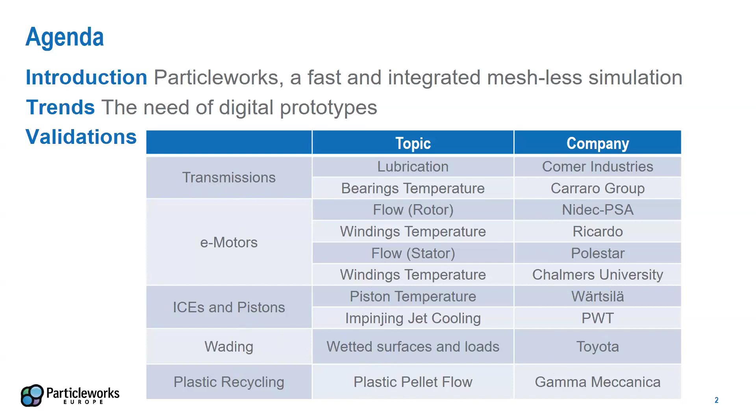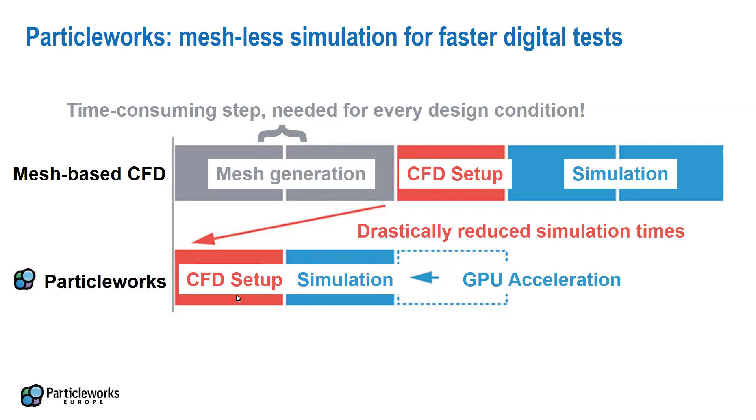So let me just introduce the method first. Particleworks is a CFD software that is a little bit different from conventional mesh-based CFD because it doesn't require this step here that usually takes quite long preparation. Whenever I use mesh-based CFD, I have to prepare my geometry from the CAD, simplifying it, and also create a computational mesh that is the basis of our simulation. With Particleworks, we can just jump start and go to the CFD setup and the simulation.

So here we have a visualization of the differences. On the left, we have the computational nodes pre-calculated during conventional methods. In Particleworks, on the other hand, we have particles that are themselves the simulation nodes, and they are automatically computed at the beginning of the simulation. So we don't have to deal with this step, and they are automatically generated.

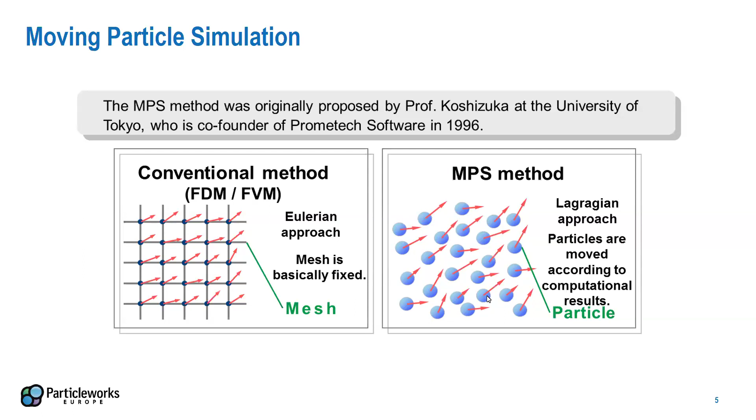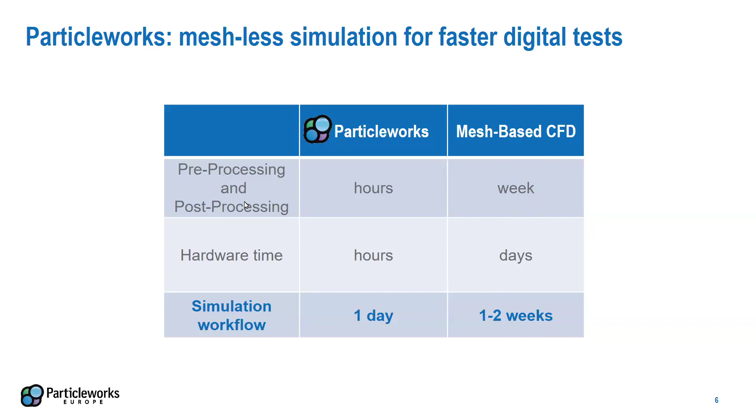Of course, this approach is very suitable whenever we have splashing phenomena, like in gearbox lubrication, or multi-phase phenomena as well. And in general, we are looking into a 1 day simulation workflow for cases that previously required more than weeks. We will see the applications, and if you try to use mesh-based CFD for them, that will require a lot more effort, both on the hardware side and on the pre-processing side, so man-hours.

So in general, what we are looking at is a fluid simulation tool that doesn't require mesh generation, so you can directly use the CAD as it's designed by your design department. It's very simple to set up a numerical simulation. And because the algorithms behind Particleworks are easily parallelizable, we can take advantage of GPUs, of graphic cards, and have more compact solutions in terms of hardware. We don't need a cluster with thousands of cores, but we can leverage the computing revolution that we are seeing in graphic cards.

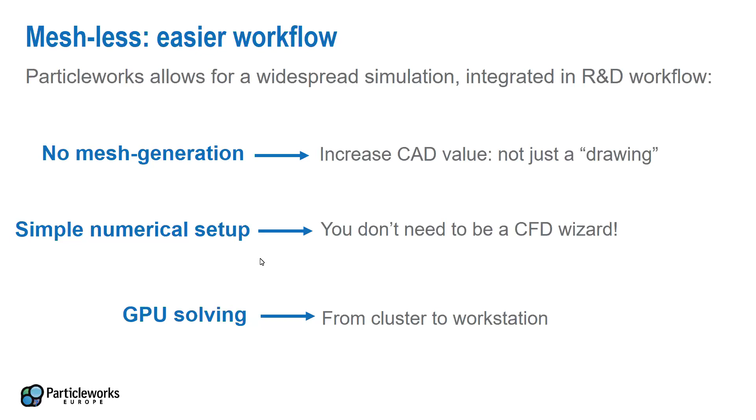So let's talk about trends. Why now? Why is simulation more and more applied in engineering? Well, there are several reasons. We are seeing a world that is increasingly digital because of different trends. COVID and supply chain shocks made this transition towards digital faster in the last years. By digitalizing the prototyping phase, you can have faster R&D and avoid supply chain shocks, so you're not stuck because of price inflation or materials availability.

And moreover, the digitalization of R&D and engineering can actually improve, as shown by this McKinsey analysis, the value of your product, because you reduce time to market and you increase the performance of your system by using digital prototypes.

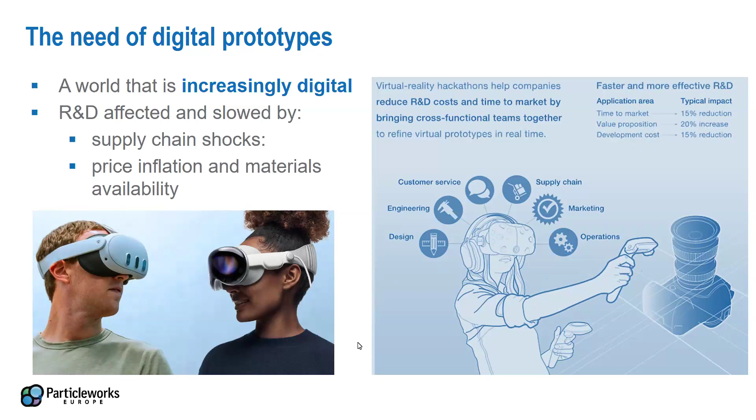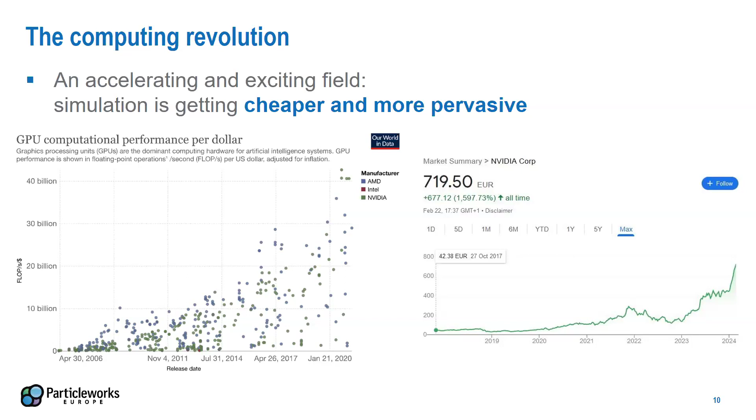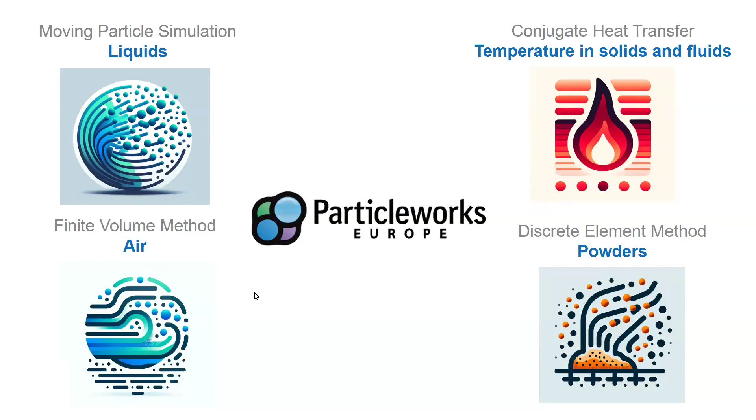And the solution here is not just about fluids, it's also about other aspects that your system might have, like airflow, powders, or, let's say, temperature evolution of your system. So inside Particleworks, we see different modules in the same license, in the same graphic user interface. So you can integrate different aspects of your model, and I will try to give you visibility in that regard

with the examples. So most of the validation we will see today is from our conference. It was held in June last year, and I will also include at the end of the presentation the official invite to the next conference that is going to be in September in Frankfurt. So the results, as mentioned, are coming from our partners that decided to present publicly. So let's see the validation, and let's start with transmissions.

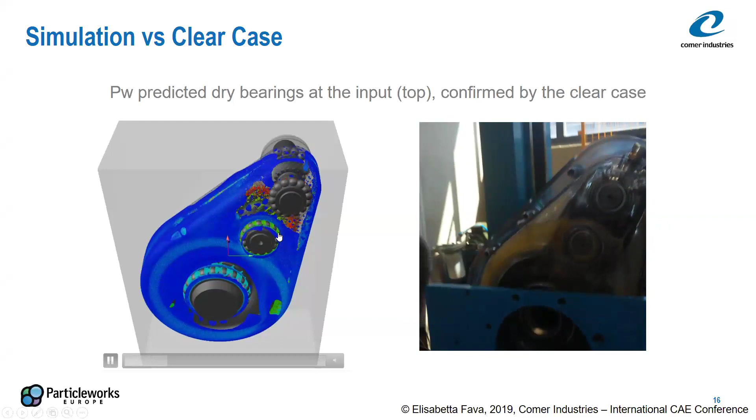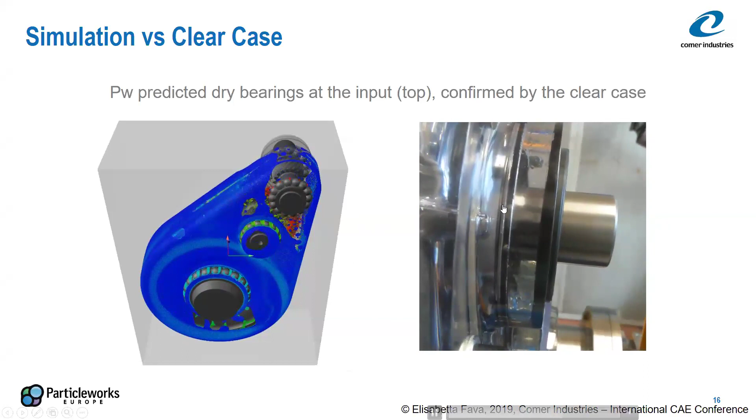One of the first examples of this approach was applied in 2019 by Comer Industries. They develop transmissions for different types of heavy-duty, let's say, vehicles. And we see here a comparison between the standard approach, the testing approach with clear casing, and the lubrication prediction by the software. It's very interesting because you can see clearly that the oil film formation is matched quite accurately by the simulation. Of course, the simulation allows you to extract more value because you can inspect regions in a quantitative way that with the experimental setup you can only guess.

So to validate that, we compared different running conditions, rotational speeds and directions, and we evaluated together with Elisabetta Fava the amount of oil in different regions. So as you can see here, the engineer in Comer Industries correlated different areas, and 4 means a good lubrication level. And we can see clearly that for this condition, there is good lubrication, while on top, there are bearings that are not lubricated, and it's confirmed by the simulation.

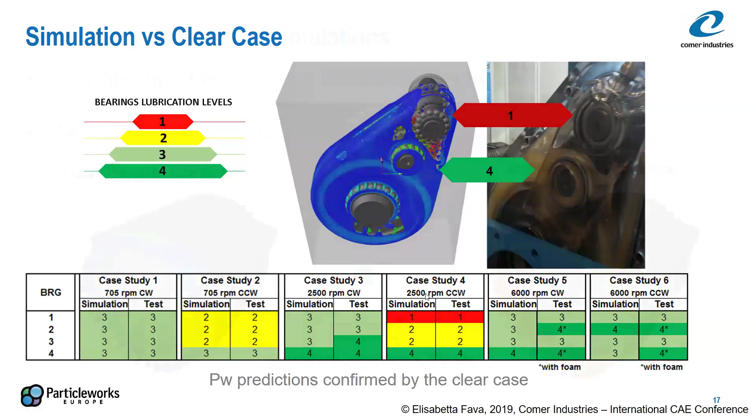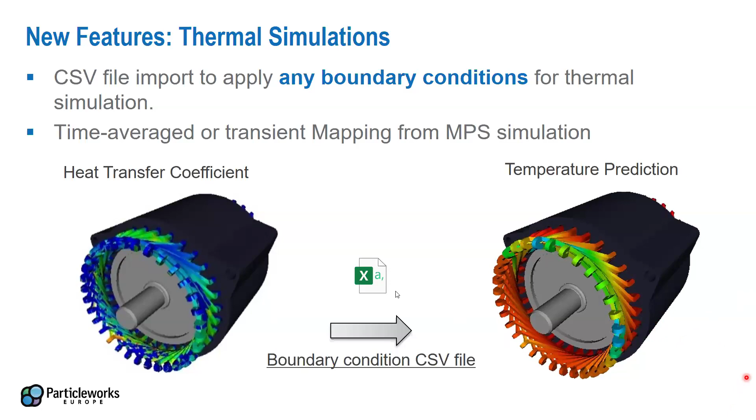So not only fluid-related topics can be applied to gearboxes, because right now we have a thermal solver in Particleworks. So basically the idea is that you can not only predict the heat transfer coefficient due to oil, but you can also solve for the temperature prediction in the solids. In this example, we have first a CFD-only simulation in Particleworks for oil that cools the coils of a DC motor in this case. And then we can transfer to the thermal solver integrated in Particleworks for the prediction of temperatures, okay? So let's see this method applied in the gearbox example.

We can see here on the fluid side the temperature evolution of the fluid as well. So effectively you can analyze flow distribution but also temperature distribution in the fluid and in the solid. You can see here that because of the bearings heating, there is some build-up of temperature close to the bearings. And on the right, we are also simulating an external cooling system at the bottom, some water flowing and cooling the bottom of the gearbox. And we can clearly see that the average temperature of oil is lower because of that.

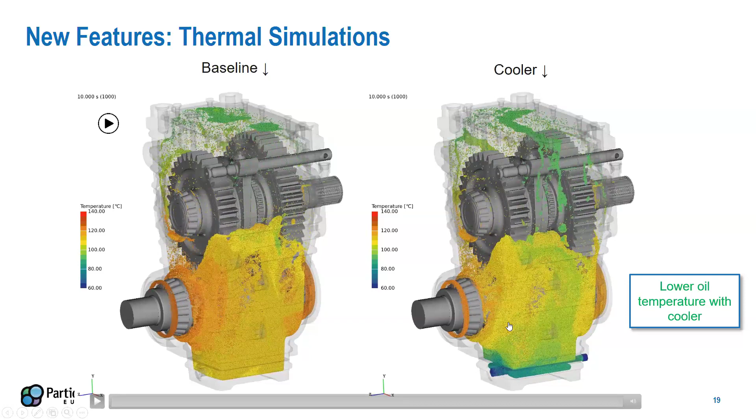So this is the most complete example of temperature in the solid that transmits to the fluid, also the fluid temperature that transmits to the solid, and you can transiently see what is going on in your system. Let's see a similar example of temperature prediction. In this case, Carraro applied this method, again, to evaluate the lubrication, but also to understand the temperature behavior of the system. There were several objectives here.

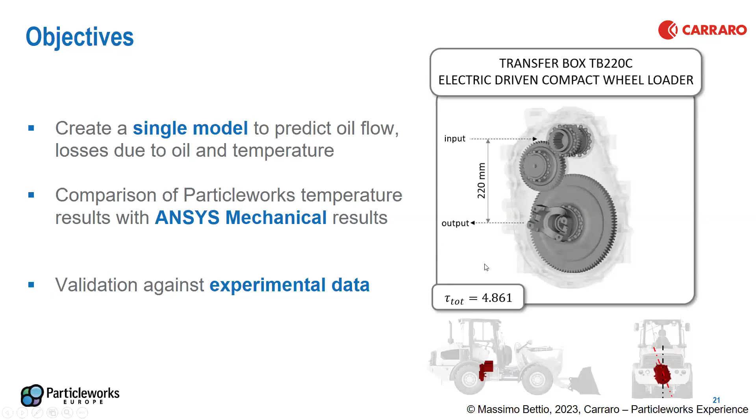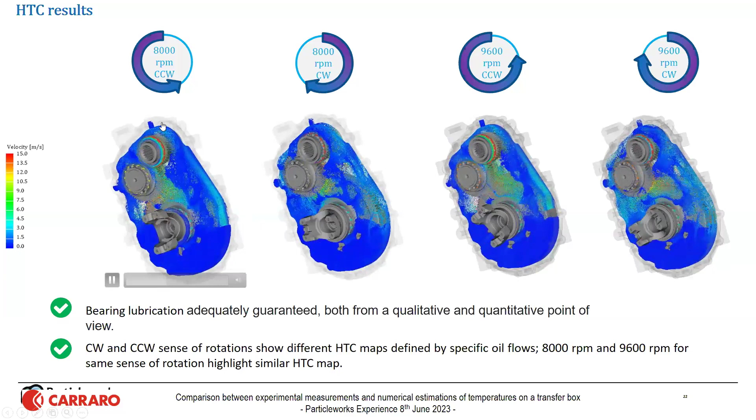First, of course, predict oil flow, and then compare the thermal solver inside Particleworks with ANSYS Mechanical results. And at the end, there were also thermocouples placed at the bearing side to understand the temperature in that area with respect to the simulation results. This is the transfer box they analyzed. And here are the initial results from CFD. So Particleworks prediction of flow for 4 different conditions, clockwise, counterclockwise rotations. And at the end, you can see that the output is actually the heat transfer coefficient due to oil splashed on the gearboxes, okay?

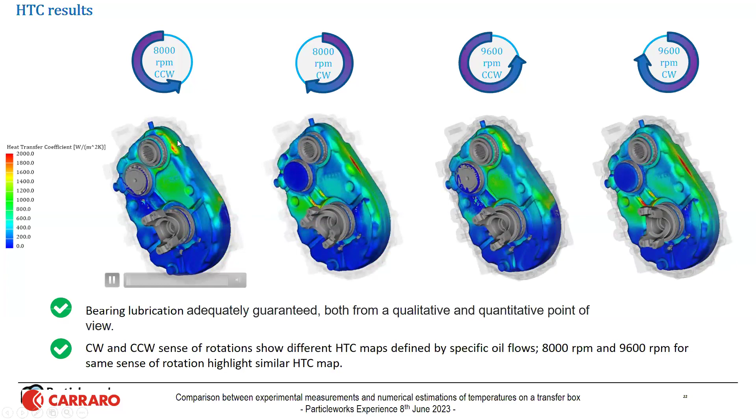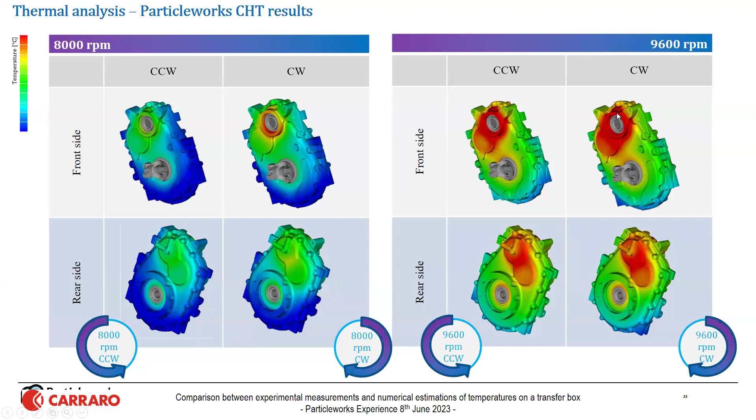So we see here that, of course, depending on the rotational speed or the distribution, we have different amounts of oil in different areas. Those maps were applied to the thermal solver to extract the temperature. What we are seeing here are temperature predictions, not HTC maps anymore. So basically, we applied those HTCs to a thermal model in which localized heat sources were applied, because of course at the bearing side we have localized heat sources, and we can clearly see that the higher we go in the gearbox, the lower the amount of oil and the higher the temperature.

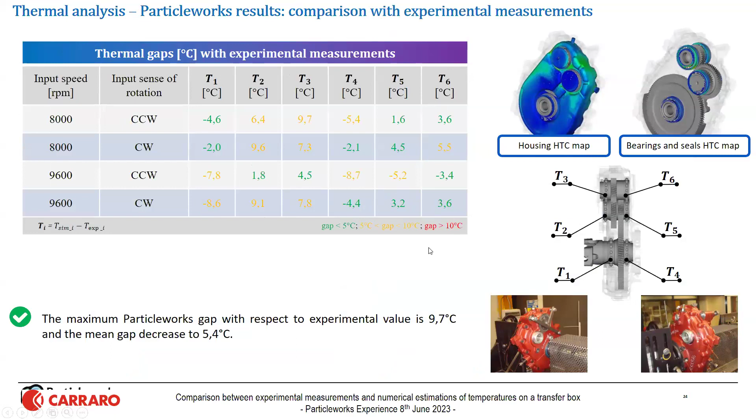In order to validate that temperature distribution, as mentioned, there were several thermocouples experimentally measured, comparing the predicted and the measured temperature. We are looking at a gap below 10°C, which was the desired range by the customer.

Let's move on now to e-motor validations. This method, Particleworks, is applied also for e-motor cooling. The idea is to use oil jets directly going to the most critical areas of the e-motor, like the windings here. We can see in green some oil accumulating around the windings. And you can see here jets actually coming from the center, the rotating shaft.

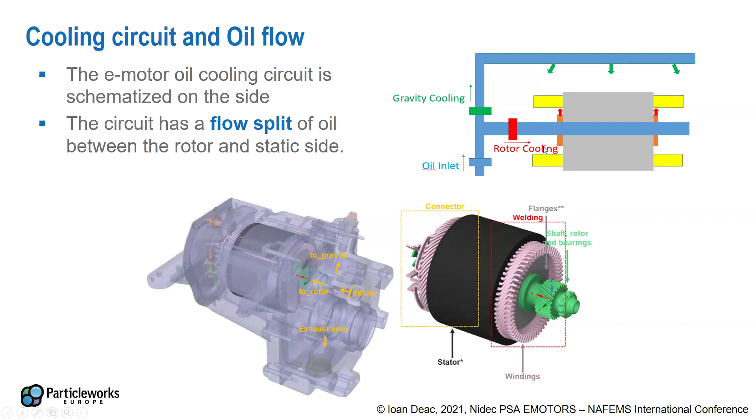Nidec PSA started to use the software a couple years back, and they were looking at this system. They have a distributing cooling system that is partially rotating. They first wanted to understand the flow split between the two branches of the cooling system, the rotor and the gravity cooling, when the rotating velocity varies. Of course, the higher the rotational speed, the higher the flow going to the rotor.

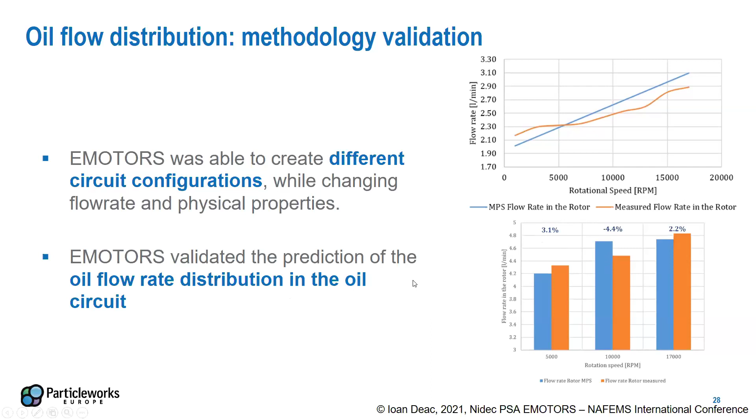To validate that, several conditions were tested experimentally. Basically they increased the flow rate and also the rotational speed. This is the flow rate going to the rotor, and the rotational speed of the rotor is on this axis. As you can see, the measured flow rate in orange is increasingly important, and the simulation results are able to capture this trend with a gap of approximately 3 to 4%. That was one important validation of the multi-phase flow and the flow split between different areas.

But of course, this method is applied in the end to estimate temperature distribution, because temperature distribution and hotspots in e-motors are very important to understand if the magnets, for instance, are operating at a stable temperature, because there are some materials in e-motors that are very temperature sensitive. A small variation of temperature could decrease the e-motor lifetime by years.

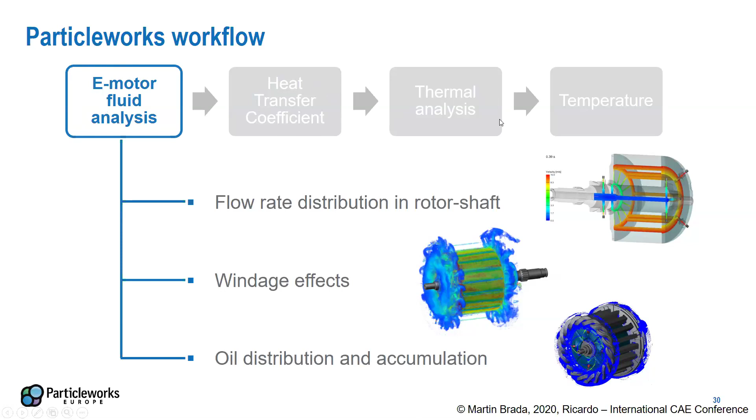The full workflow implemented by Ricardo in this case showed not only the flow rate distribution in the distributing channels, but also air simulation to understand windage effects, including the air gap windage effects between the rotor and the stator, and at the end, the simulation of oil jets. In this small example, we see oil accumulation in blue inside the e-motor and heat transfer coefficient estimation. Once you do the CFD, you can extrapolate the heat transfer coefficient and perform the thermal analysis.

This was done. What we see here is the output from ParticleWorks, an HTC map, and this map was validated with a thermal solver. The temperature prediction here is from a thermal model integrating this map together with the electromagnetic losses estimated by other software like ANSYS Maxwell. It's clear here that we have a hotspot that you miss if you don't analyze the 3D structure of the model. On top, you see a hotspot on the stator that is not well cooled.

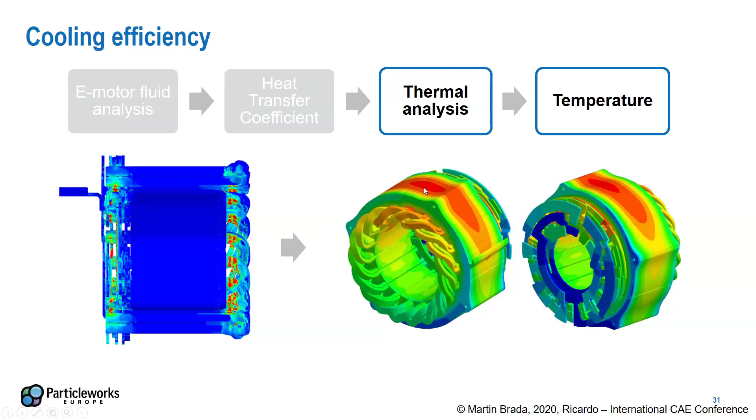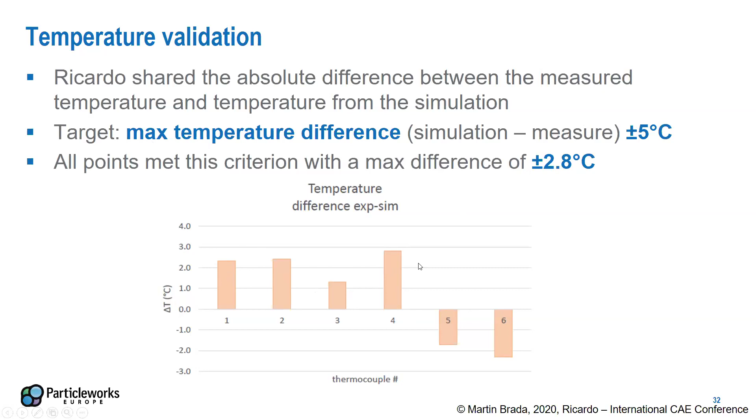To validate this temperature distribution in the windings, Ricardo placed 6 thermocouples on the coils. We can see here the differences between the temperature prediction in ParticleWorks and experimental. We have a gap below 3 degrees Celsius, and the target from Ricardo was a gap below 5 degrees, so well in the range. And we can see that all the thermocouples are basically there.

Chalmers University also presented about applying ParticleWorks to e-motor cooling. In this case, they had a little bit of a different system. It's not forced lubrication with jets coming from the rotor or the stator, but actually a bath of oil type of lubrication. The idea is to have some oil inside the e-motor, and then because of the splashing due to the rotating element, this oil will cool down the most critical areas.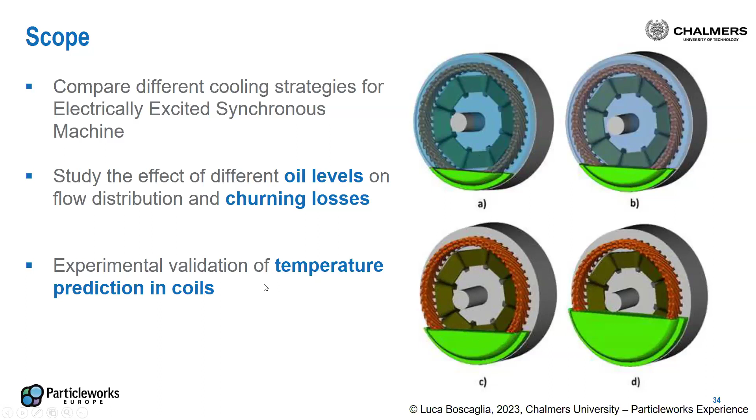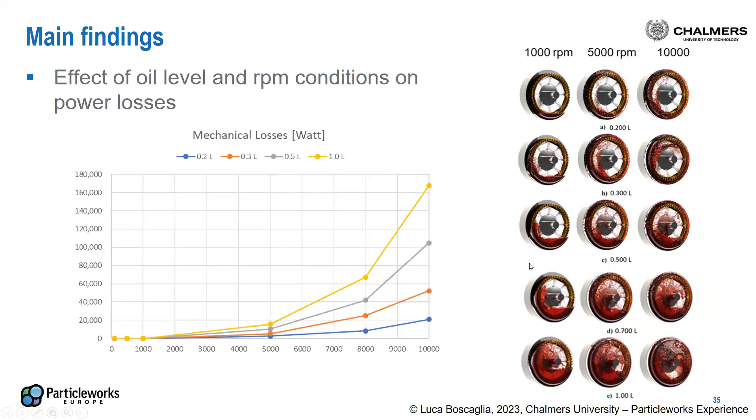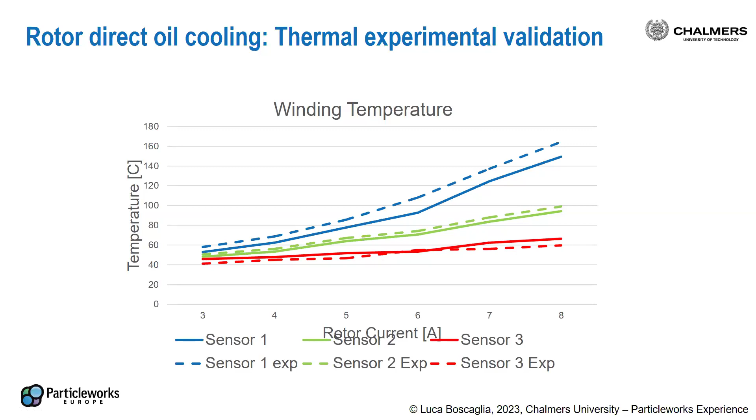Coming a little bit towards the second part and towards the end, we have now engine and piston cooling application. One of the first applications in the field was from Wärtsilä in 2018. In this case, there was a naval piston with 20 thermocouples, so a very detailed distribution of temperatures. Basically, there is this closed gallery system in which oil can enter.

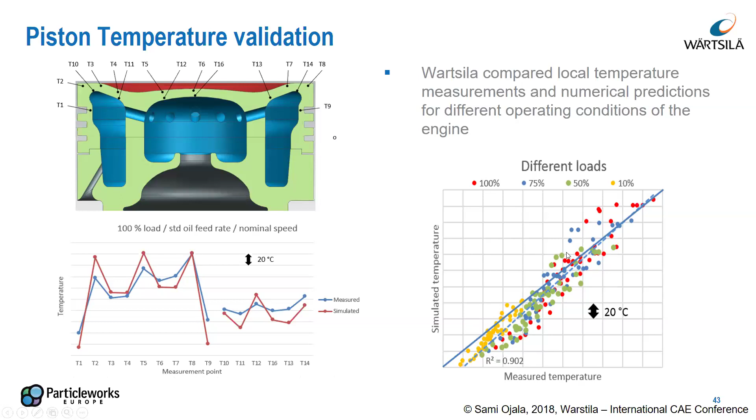When you have different loads, higher load of course means higher temperature in general. And you see there, at 10%, we have this kind of distribution of temperature here. So very, very promising results already in 2018. And right now we see a lot of applications also to fine tune some aspects of the simulation.

Andrea Bianco presented last year at Particleworks Experience about having a precise Nusselt correlation to estimate the impinging jet heat transfer capability in this kind of system. We see 2 types of jets going towards the piston. The objective was to understand the flow distribution inside, the temperature prediction of the thermal solver, and also the implementation of this Nusselt correlation type of impinging jet estimation.

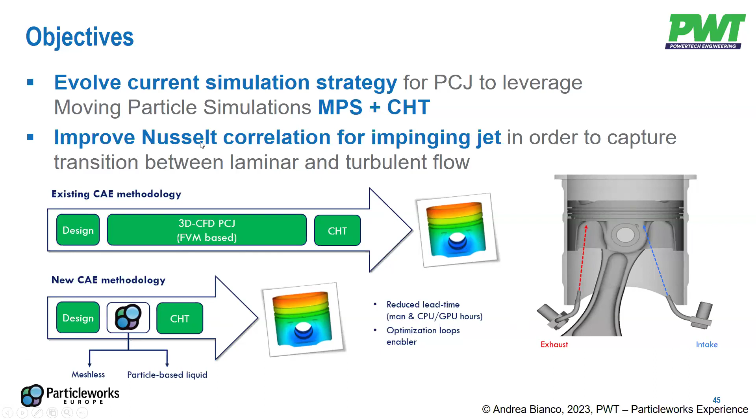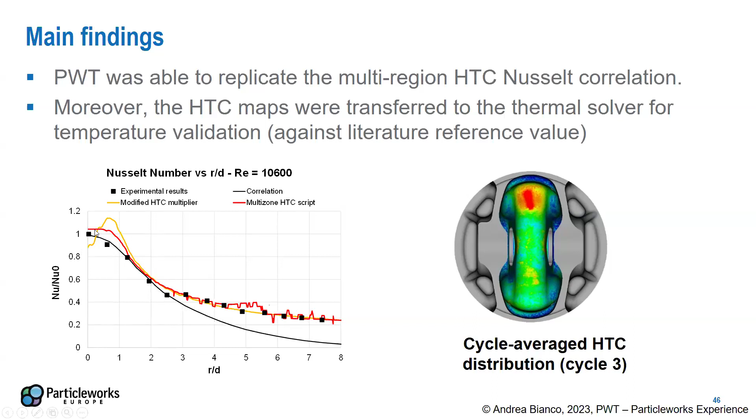Andrea Bianco was able to implement a correlation inside Particleworks that can really capture the experimental result. This is the theoretical correlation that we should have. The experimental results are in the squares, and we see the multi-zone HTC script developed by the engineer is well able to capture all the zones of this impinging jet area.

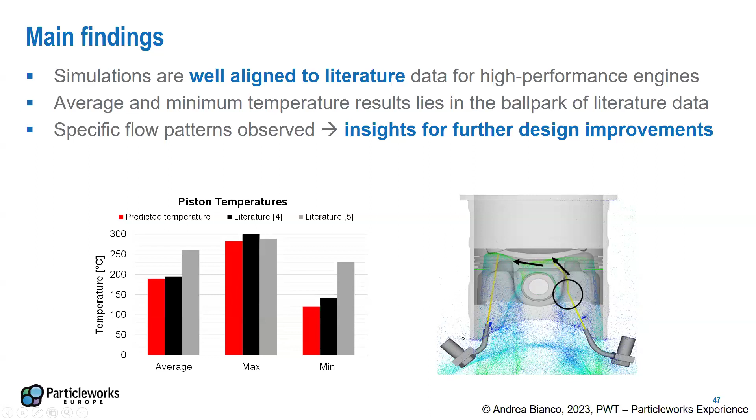We can see here one undesired interaction between the jets and the moving piston. In a certain position of the piston, there was a very peculiar interaction on the piston side that was undesired by Andrea. So, as mentioned, you can have insights into your design by iteratively simulating with Particleworks.

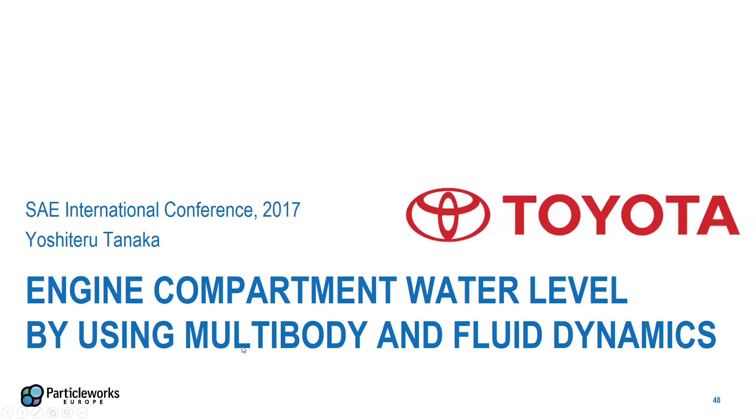Let's discuss two more papers and two more simulations in a little bit different fields, not only automotive internal combustion engine or transmission, but now automotive on a car body level. Toyota presented at the SAE International conference in Japan in 2017 this type of simulation. We are now looking into a wading simulation. You see here all the water simulated in Particleworks and the car entering the puddle.

The objectives here are different. For instance, you want to understand how much water can enter the car body. And you also want to estimate the loads, the forces due to water on the car body, especially on sensitive plastic inserts like battery covers.

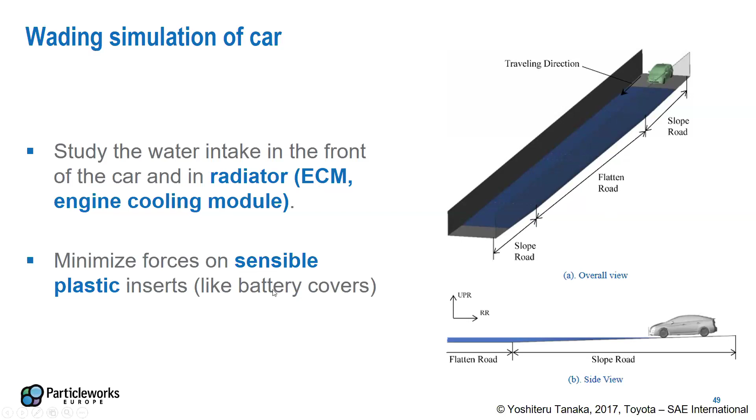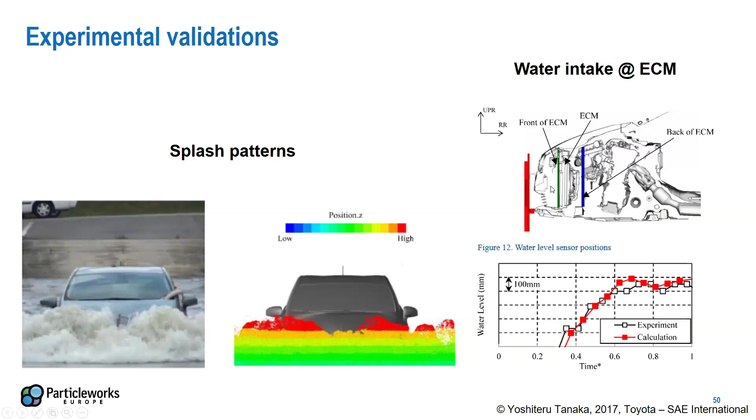Here is the validation, both in the splash patterns on the front. You see that the splashing phenomenon is well captured by Particleworks, with a lower level in the center of the car. And on the right, we see the water intake when the car starts to enter the puddle. The water level in this area at the front of the cooling system, the radiator, is well captured by the calculation.

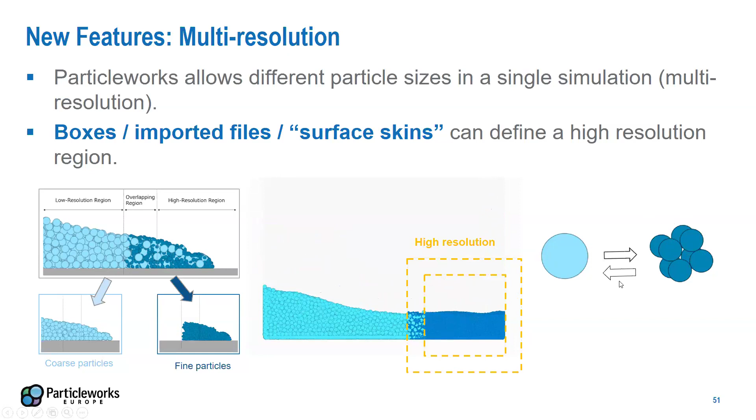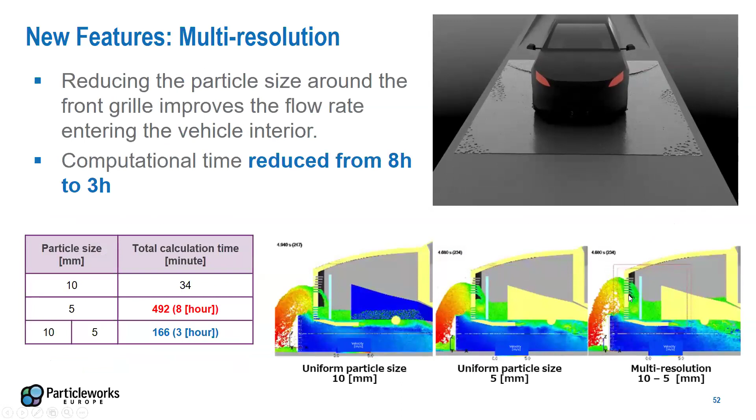By the way, for this kind of application, we now also offer a new feature. Particleworks has multi-resolution capabilities. The idea is that we have regions of the simulation where the particles are redefined with a smaller particle size. So they are transformed, as you can see here, into smaller particles. In the wading example, you could have a finer resolution at the radiator side. Of course, we don't want all the water to be discretized with the very small particle size necessary to study the flow in that area.

We can take advantage of multi-resolution to do exactly that, redefining the particle size, like in this case, from 10 to 5 millimeters. Because of that, we are optimizing simulation times. If you want to simulate everything at 5 millimeters, it takes 8 hours. But if I apply the multi-resolution region, the slightly visible box here, only to the desired region, you can go to 3 hours simulation time.

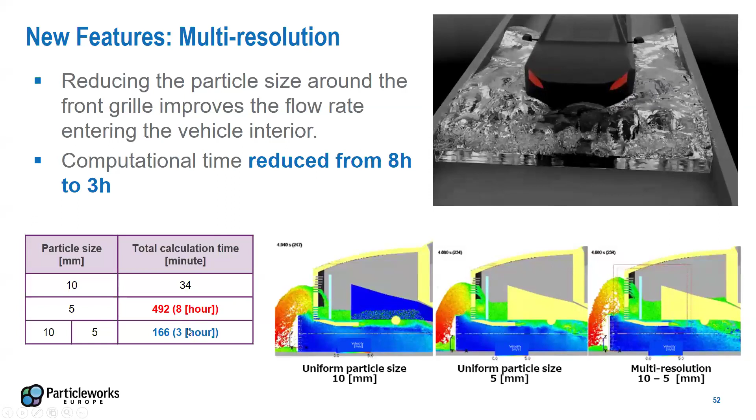At the end, I want also to mention an example of validation of Particleworks, in this case for plastic recycling machines. So it's a very interesting type of application as well, because we will see that it is not only fluid moving particle simulation, but also powder type of flow coupled with the water. So let me just show you.

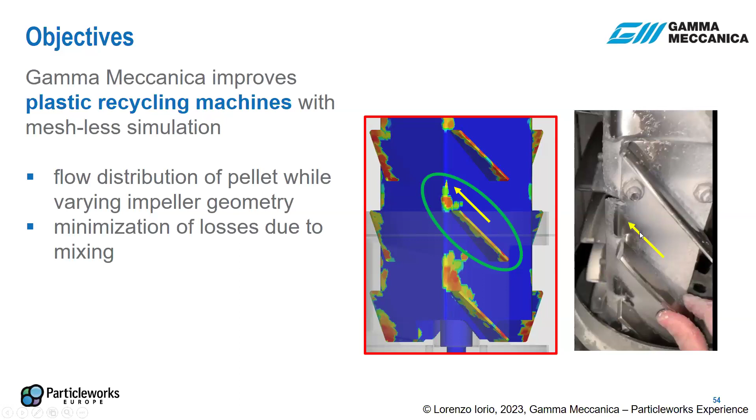Basically, we have a system that has a flow of water mixed with plastic pellets, and the objective with this type of rotor is to separate the water amount from the plastic amount. You can see here a map of flow in Particleworks and what was observed experimentally, and you can see clearly that there is accumulation in a specific region. So just from the first simulation, the customer was quite happy to see this kind of flow, confirmation of the flow.

Moreover, they also tested different rotors, and they looked into the power losses due to different rotor geometries. The numbers are not public, but we received very positive feedback in terms of experimental validation in this regard. So again, we are looking into temperature prediction, but also losses due to interaction between rotating elements and fluid or powder. And also fast iteration of the design, because three geometries were designed in less than one week and tested with simulation.

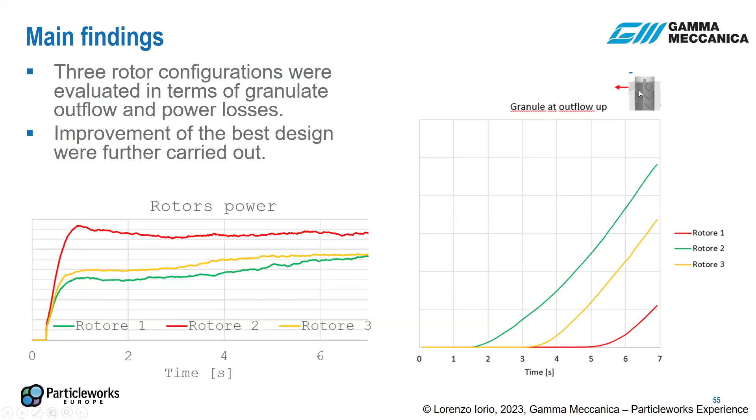And this, by the way, the output at the top, is the amount of plastic that is reaching the top. And you can see that we get faster separating time by improving the rotor geometry. So just to summarize, Particleworks is widely applied in different areas, both in automotive, but also separator type of technology, mixers, external aerodynamics and fluid dynamics. So I just wanted to give you a little bit of an overview of the main most recent validations and features of the software.

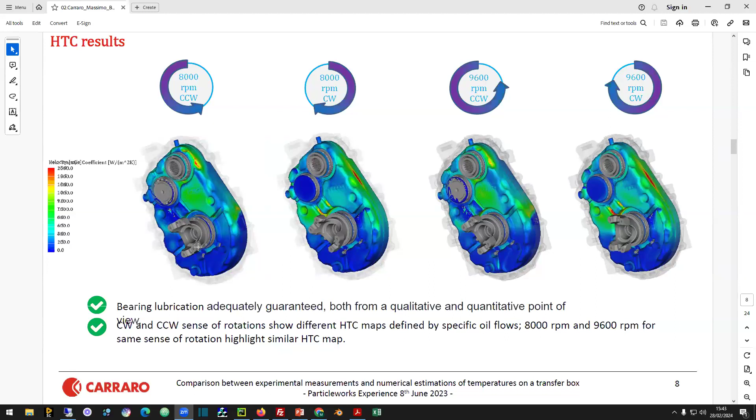So regarding the question about mechanical losses, this is again from the Carraro presentation. The workflow is as follows. We don't have a mechanical solver inside Particleworks, meaning we cannot estimate losses due to solid to solid interaction. In that example, as you can see, we have bearing friction with losses estimated by ISO standard.

But what we can do is understand how the churning losses due to oil applied to the gears are distributed between the gears. Because the previous methodology inside the Carraro workflow was to apply a distributed churning due to oil, but without a differentiation between the different gears.

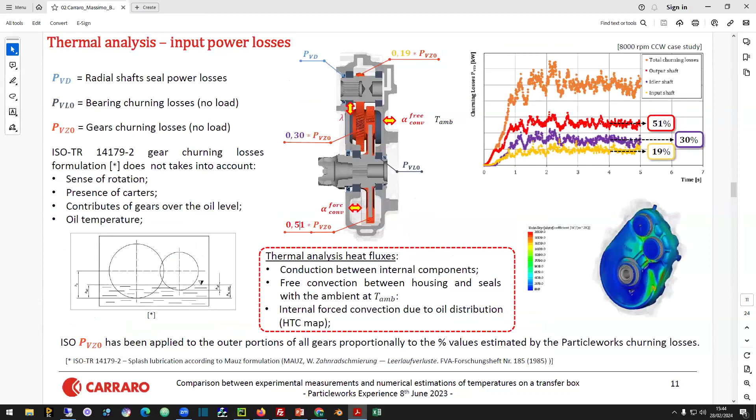But what you can see here is that different gears will have different amounts of losses. The lowest one has 50% of these losses. So when you apply the churning and the heating due to oil, you need to take into account this kind of distribution that is not linear. But again, the heat sources at the bearing side were applied to the thermal solver inside Particleworks, but were estimated by ISO standard.

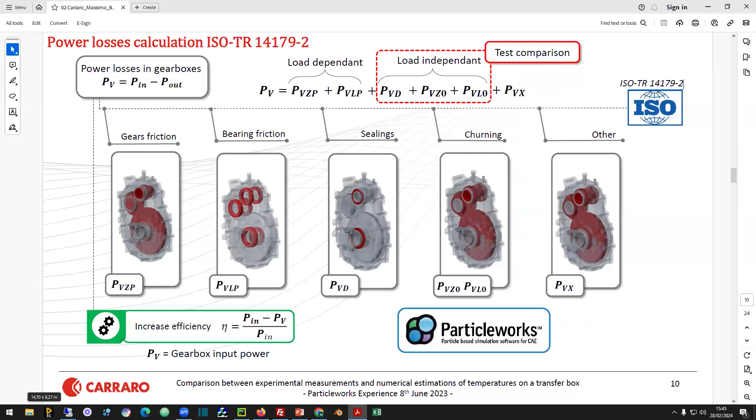This is a meshless approach, yes, and we can simulate air in different ways. We can simulate with particles or with a finite volume solver. I discussed here the modules inside Particleworks, and there is a finite volume method and also a lattice-Boltzmann solver inside Particleworks. We can also use another software called RecurDyn for seal deformation. So gaskets or flexible elements can, of course, be modeled.

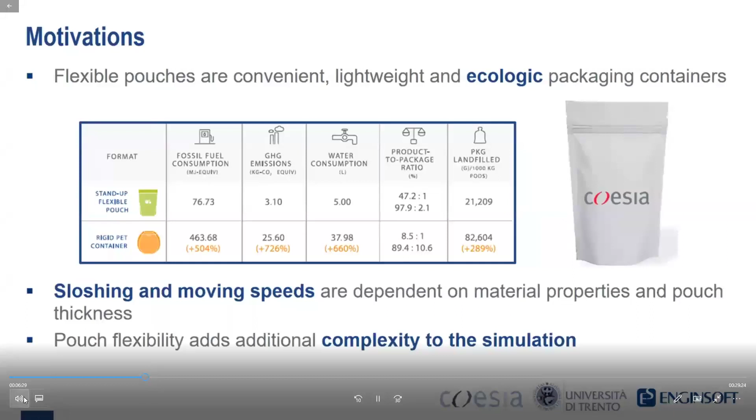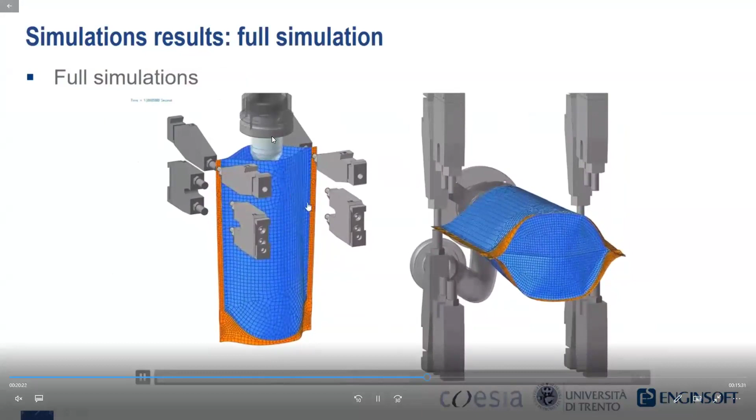So let me show you this example. In this case it's a different type of application, but basically we have flow in this flexible pouch. The flexible element was analyzed with another solver, but inside here we have a flow of detergent, a non-Newtonian fluid, that is injected, and then there is sloshing on the deformable object when moving the pouch around in the filling process of detergent.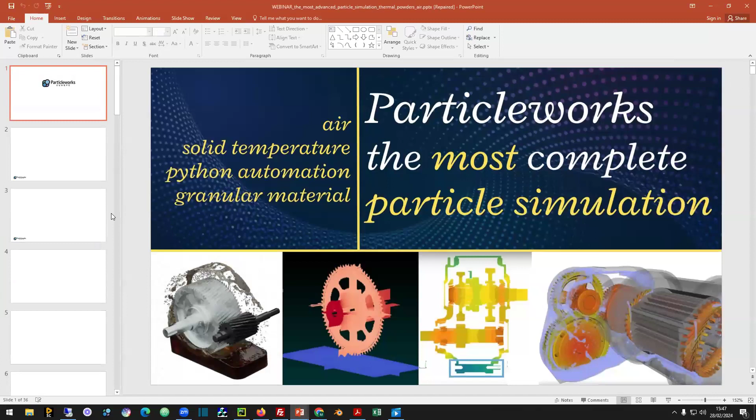Roman asked, in a coupled fluid thermal simulation, how do you deal with the different characteristic time between the two physics? That's a great question. Actually, we don't, sorry. Let me see if I can grab one slide. There are several strategies to include or not the thermal simulation. So here we see all the strategies to include the temperature prediction in Particleworks, and there are some coupled or uncoupled ways to study the fluid and the solid behavior.

It's not super clear, but basically we can separate the fluid phase from the solid phase, and it was done by Carraro. So first we do the CFD, where the flow usually stabilizes in seconds. So we don't need to simulate the minutes that are typical of temperature evolution. So one strategy could be to run CFD first and then apply the boundary condition, as was done by Carraro, to a steady thermal-only simulation performed in Particleworks.

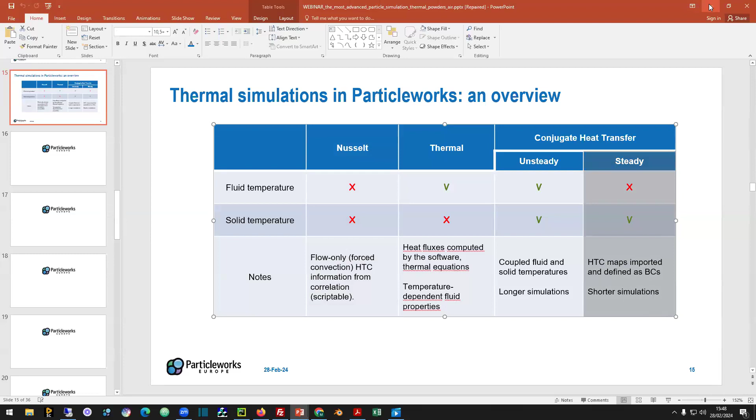In other cases, you want to have a coupled simulation, but of course that will make the hardware time increase significantly. I hope it answered that.